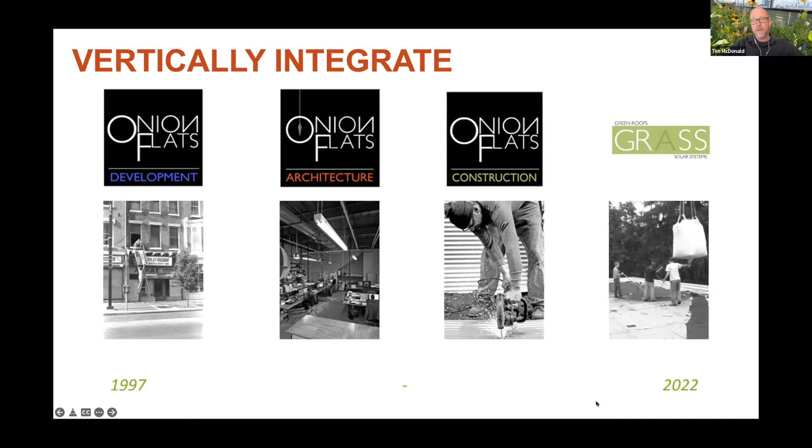Just to begin, I'm a big proponent of vertical integration when it comes to developing real estate. We're a developer, we're also architects, and we're builders. We do that not only for our own projects, but we also have a robust architecture firm where we're working for lots of multifamily, affordable and market rate housing clients. One of the other companies that's been created out of this desire to build high performance sustainable buildings is our green roof and solar company. That's kind of a separate company that does client work as well as all of our own solar and green roofs.

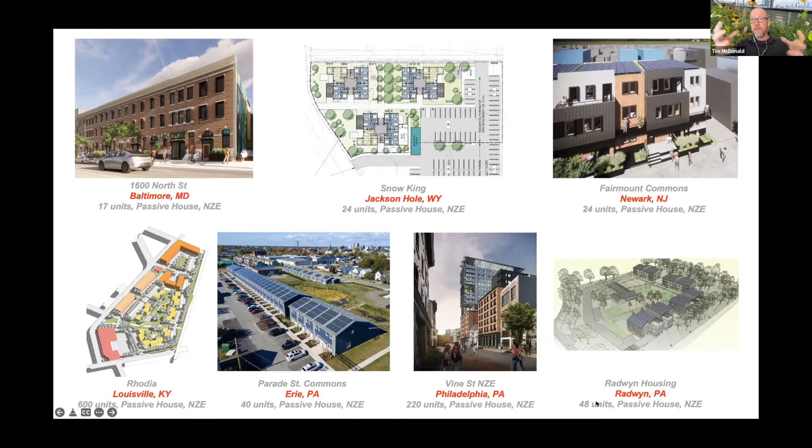These are some of the projects that we're either in the middle of, have completed, or have gone through schematic design and are on hold. It's everything from a whole retrofit series of projects that we're doing in Massachusetts, to single family homes, high performance single family homes, to these larger scale multifamily projects in Philadelphia, but really all over the country. Here are some other ones in Baltimore. We're doing another retrofit net zero energy passive house project in Louisville, Kentucky. So I'm just trying to give you a sense of the scale and scope of the nature of our work.

But what really grounds me every day when I wake up is the knowledge that buildings in this country are responsible for almost half of all greenhouse gas emissions. And I don't say that lightly. I think that needs to sink into everybody's brains here, particularly if you're an architect or if you're in the world of building buildings, the built environment.

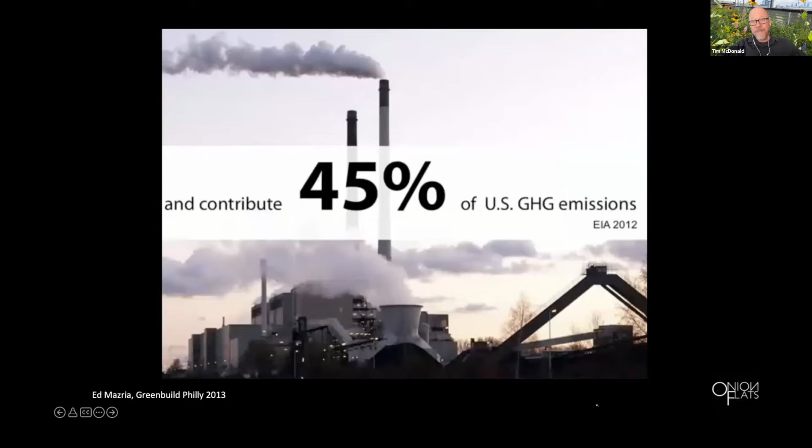We're half the issue. In Alexandria, it's even more than that. Between commercial and residential buildings, they're responsible for over half of all greenhouse gas emissions. Now, if we think we have any chance of addressing the climate crisis, we've got to do it with buildings, and we've got to do it immediately.

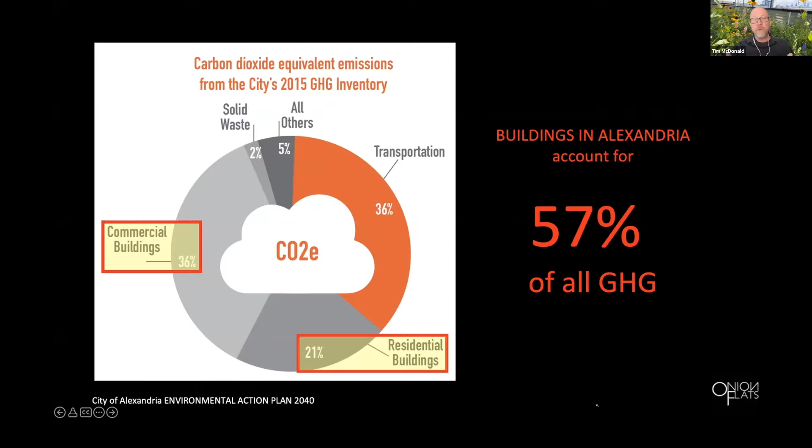Why do I say that? Because even though your environmental action plan of 2040 states what pretty much every climate action plan I've seen in any city, any state, or frankly any country uses, the 2050 target of the Paris Climate Agreement for carbon neutrality, all carbon emitted needs to go to zero, a very different world by 2050. The problem is that that's actually too late.

If we peaked emissions in 2020 and just a straight line down to 2050, just the area below that triangle accounts for about 600 gigatons of CO2 that we would be emitting. Number one, we didn't peak emissions in 2020. Number two, we only have about half that left to emit. So it's actually got to be much more radical than that.

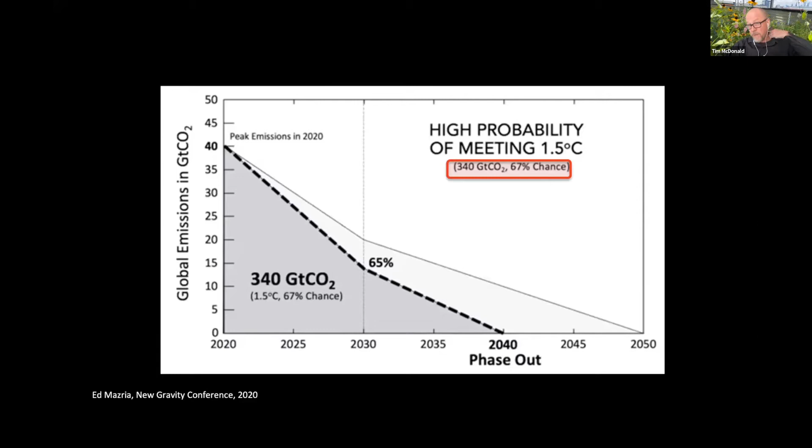We've got to radically reduce our energy consumption, as Stephen said, in the next 8 years, 65%, not 50%, in order to emit no more than the 340 gigatons of CO2 left to emit, if, of course, we want to keep the globe from warming more than 1.5 degrees centigrade, and we don't need to go into what that means in this presentation.

So for me, as an architect and a developer, that means that carbon neutral net zero energy buildings need to be standard practice, code by 2040. What that means for me is that building needs to generate what it needs on its own site. In other words, people think you can buy carbon offsets in order to pay for the carbon that your building is emitting. We're never going to get there if we treat this as a carbon offset strategy. We've got to generate what the building needs on its own site.

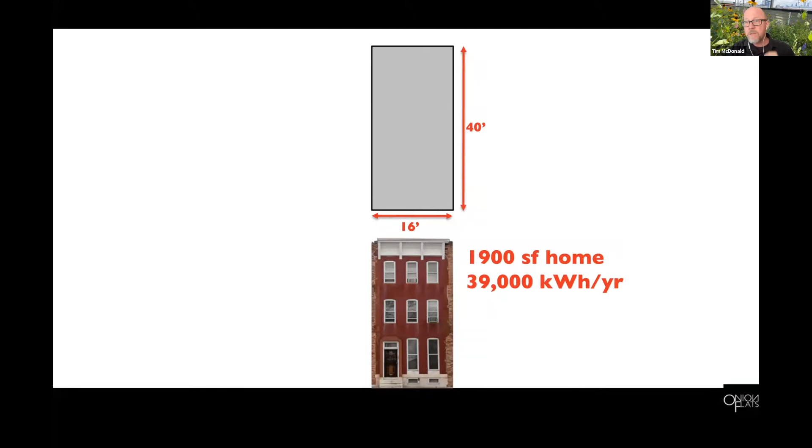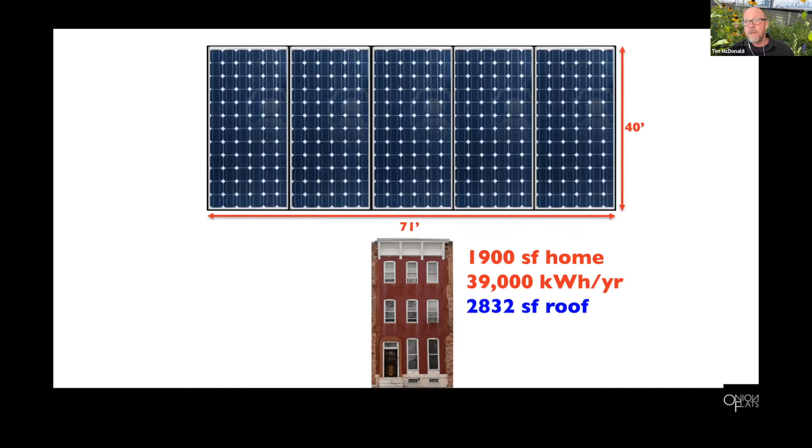Okay, so can we do that? Well, here's a typical row house on the East Coast. This is about how much energy that building uses in a year, 39,000 kWh per year. And here's the size of the roof, 16 by 40. Could this building get to net zero energy? It could, but it would need a roof 5 times bigger than it has. And so we've got to reduce the consumption to what the roof can produce, right? So that's about 80% reduction in energy consumption.

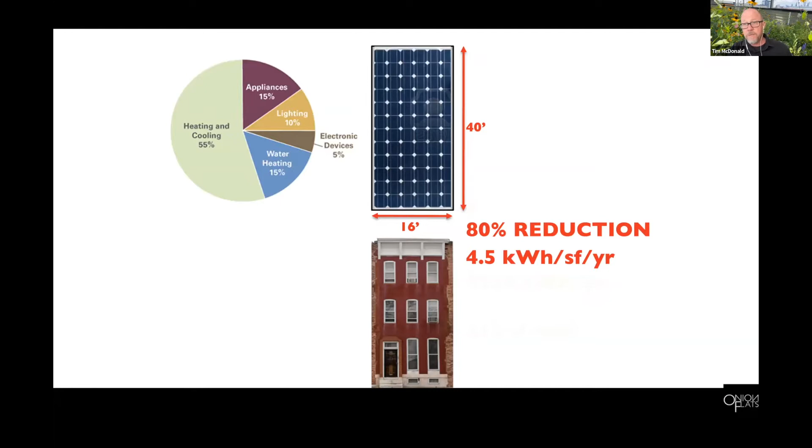We all know that heating and cooling of buildings is responsible for more than half of all energy consumed in the building. So my question is, what's the best heating and cooling system, most efficient, most cost-effective heating and cooling system out there? I think it's a coat.

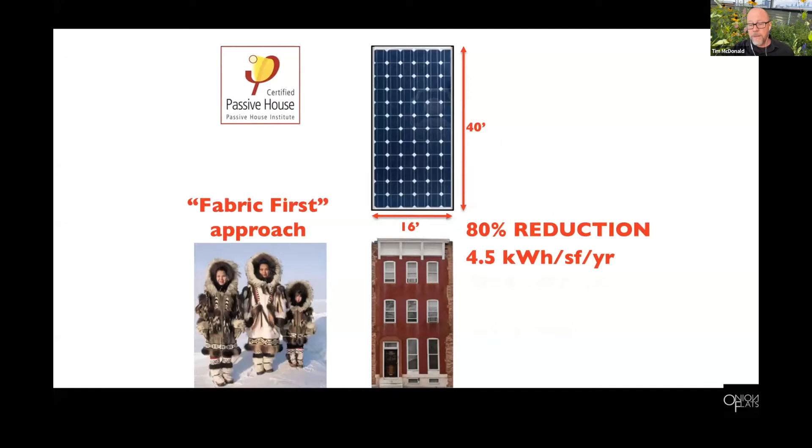And that is the essence of what Passive House is really about. It's fabric first. You're focusing on the fabric of the building first. And in so doing, by building a super insulated and really, really airtight building, you can reduce the energy consumption by up to 80% within that building. And it boils down to just simply good building science. Continuous insulation on the outside of the building, thermal bridge-free construction. You know, if you can make a simple compact shape, it's got to be an airtight building.

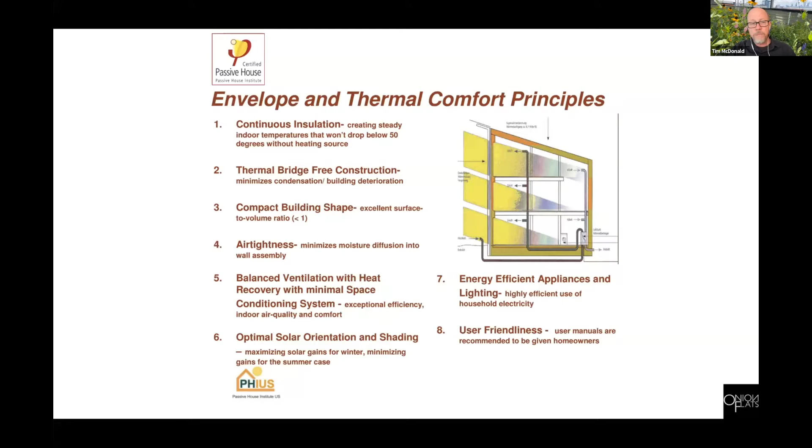But when you make the building airtight, you then have to give it a lung to breathe. So you have to bring in fresh air and you have to exhaust stale air continuously. And then just obviously, you know, optimal solar orientation, energy efficient appliances, and so forth.

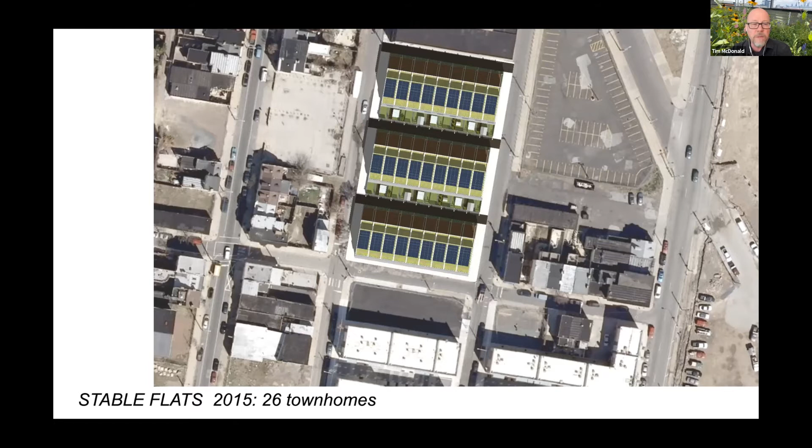So here are a couple of projects that we've completed over the past 10 or 15 years. This is a 26-unit townhome development in the Northern Liberties section of Philadelphia called Stable Flats. We completed in 2015. When you can orient your building to the south, it's difficult to do sometimes in urban environments, we do so. And so that's what we did. We aligned these three banks of housing, blocks of housing to face south so that we can manage the sun in the summer and bring it in the winter, generate power from the roof.

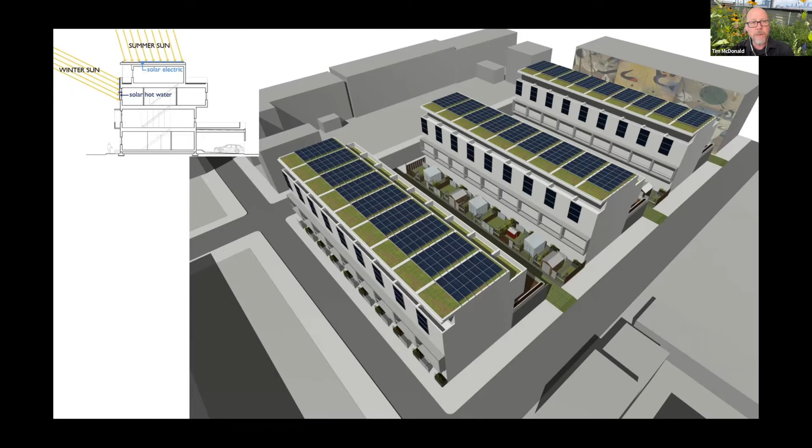But we can't just think about how we get there by thinking about how we design buildings. It's really about also how we build them, because we are effectively building our buildings the same way we've been doing for the past 150 years. And we've got to start thinking much more efficiently and effectively about how we build buildings. And so in this case, we started a modular factory.

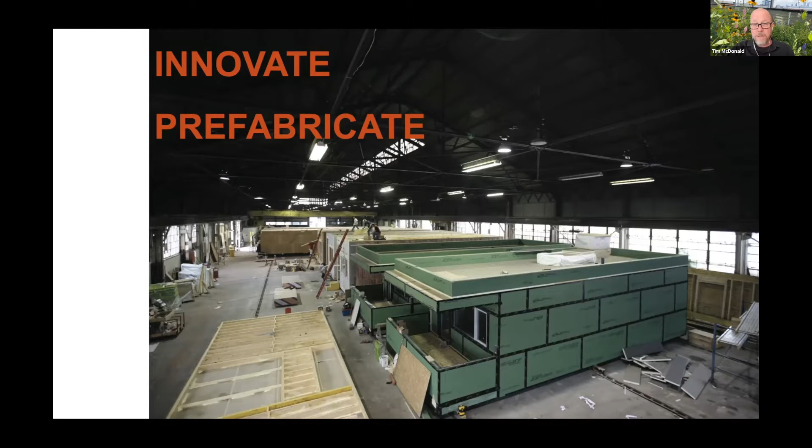We partnered with another company to develop a modular building system that could be replicated, simplified, and meet the Passive House standard. The first three houses were an experiment with many partners, built through this modular factory with plumbing, electric, and finishes all in place, and about a 4.5 kW PV array on the roof. The rest were built by different companies and partners, but all to the same Passive House standard.

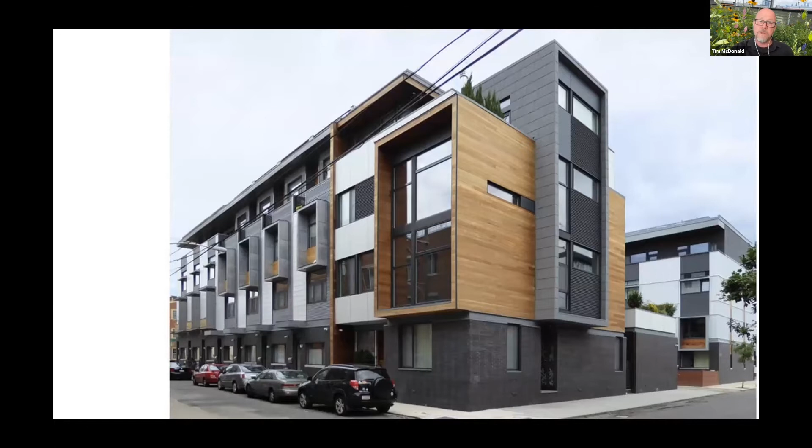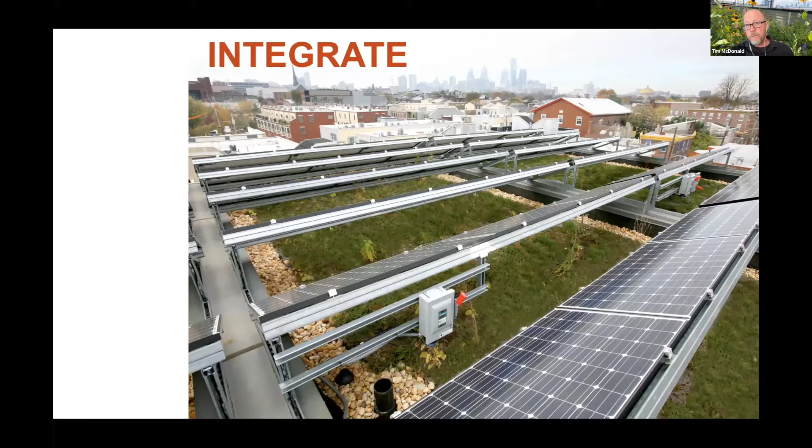I'm a big fan of really thinking about the importance of a roof, especially in an urban environment, because a roof has to do so much. It has to manage stormwater, generate the power a building needs, and since open space is a commodity, it has to be amenity space, green space, and so forth. The green roof below this solar array keeps the temperature lower, making the PV panels that much more efficient.

When you build a Passive House building, you've got to make it as tight as you can, and then bring fresh air in and vent it properly. The first thing you have to do once it's built is measure just how tight it is. 0.49 ACH50 essentially means that if you take the volume of the building and cut it in half, that half-volume of air can leak out within an hour.

That is super, super tight. Do you know what a typical building would be? It would be 7 ACH50 — seven times the volume of a typical code-built building leaks out within an hour under a certain pressure. So a Passive House is essentially about 14 times more airtight than a typical code building. And I must emphasize, airtightness is actually more important than insulation.

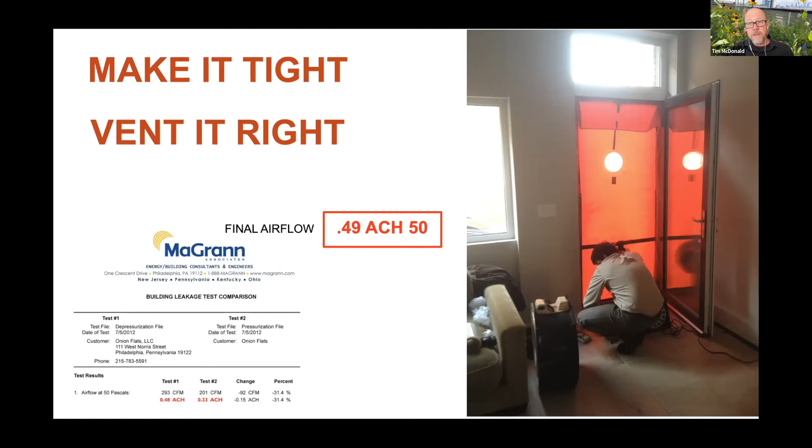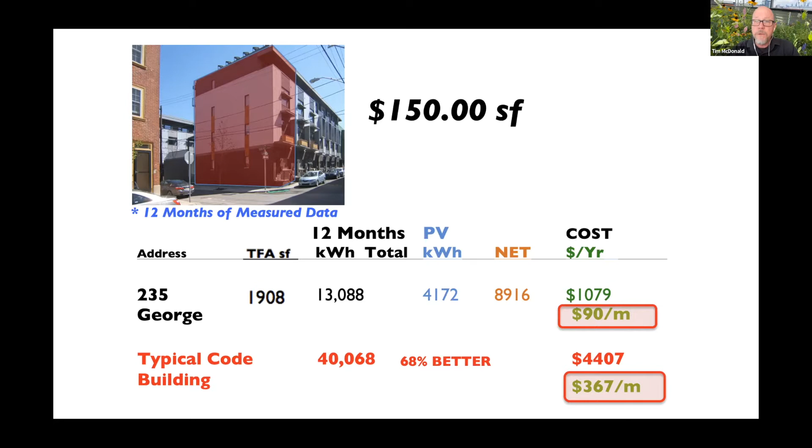And airtightness doesn't have to cost a lot of money — it's really just about attention to detail. At $150 a square foot, this was built at code-built construction costs. Part of this had to do with the decision to prefabricate, part with vertical integration, and part with carefully designing cost-effective mechanical systems. In the end, these 2,500 square foot townhouses use about $90 a month in utilities. They could put another 4.5 kW array on the roof and get to zero if they wanted.

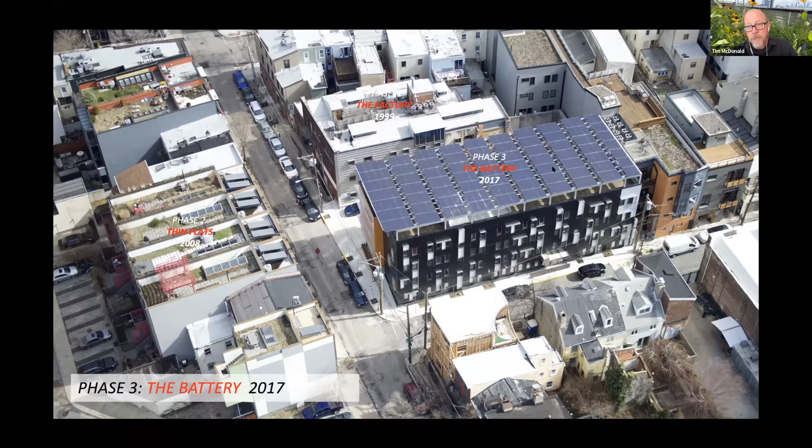Right around the corner from this is a much larger project, part of an 18-year development. The first phase was a retrofit of an existing factory, the second was the first LEED platinum duplexes in the country, and about 8 years later we developed the largest Passive House project we'd taken on, called the Battery — a 25-unit apartment building, about 17,000 square feet, with all centralized systems, which I'll mention briefly and we can talk about later. We're tending to move away from centralized systems now, but you can get a sense of the R-values in the walls and roofs.

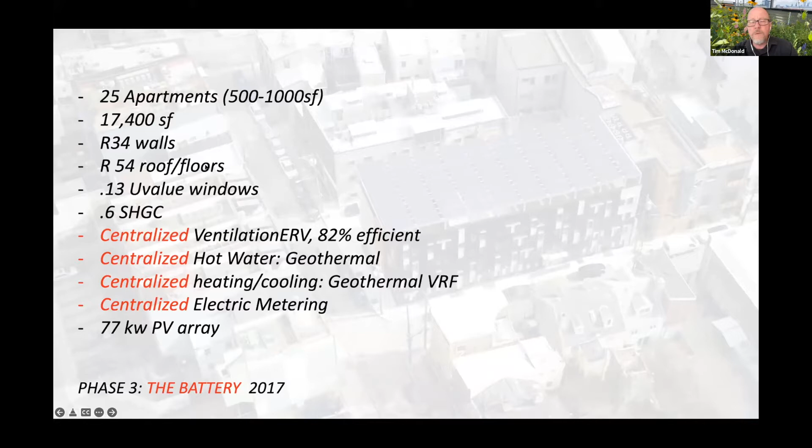This is pretty typical for Passive House within our climate: R34 walls, about twice what code requires, and R54 roof — not too crazy — with really good windows. At the ground level we needed parking like most projects do, so half the ground floor is parking, half is lobby and a couple of units. It's a very simple organization, mostly one-bedroom units with a couple of two-bedrooms, about 500 square foot apartments, double-loaded corridor.

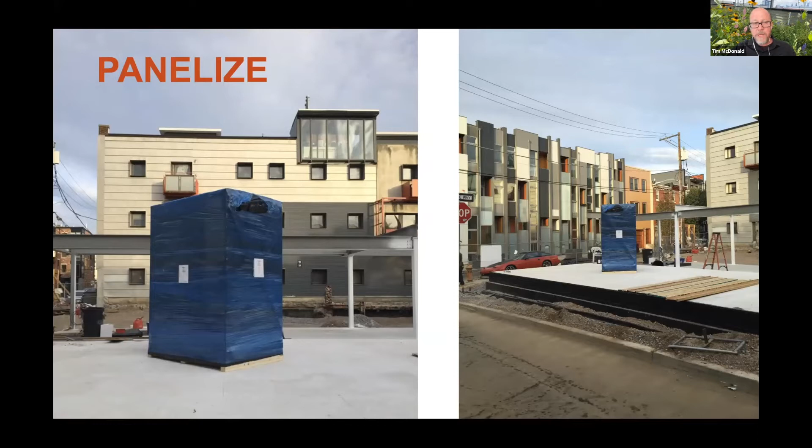As I mentioned, prefabrication is key to cost control for us. In this case, instead of modular, we focused on the envelope — the most challenging part of a Passive House building — since that's where it needs to be really well detailed. We're big fans of not reinventing the wheel or training an entire industry, so our envelope arrived complete with triple-pane windows and doors already installed, along with the weather-resistant barrier, air barrier, and exterior insulation. This building went up in half the time, and cost half as much from the framers since they didn't have to install windows or put on all those layers — they just had to put the pieces together.

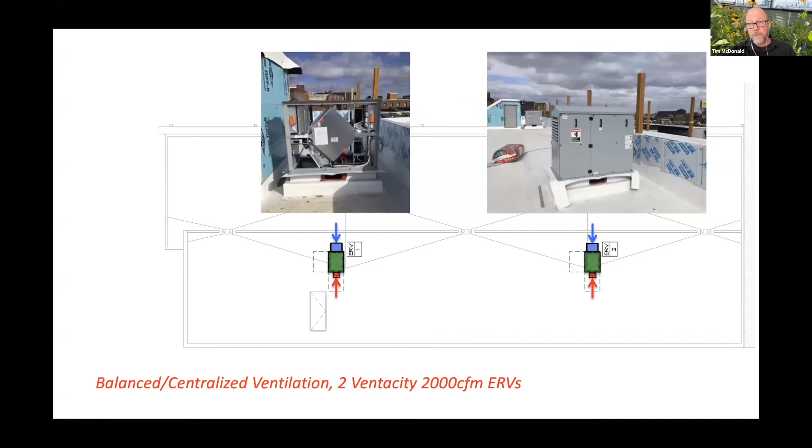Again, an airtight building, you've got to give it a lung to breathe. We've got 2 centralized ERVs, energy recovery ventilators, on the roof that exhaust all the air 24/7 at a very low volume, and then supply air at the same time without losing any energy. Here's that kind of pulmonary system of supply and exhaust in the building. You're supplying each bedroom, each living room, and exhausting each kitchen and each bathroom. And it needs to be balanced. Whatever you're bringing in, you've got to bring out.

And the other beautiful thing about balanced ventilation is that it's triple filtered, so the indoor air quality and the health of the occupants is superior to none in a passive house building.

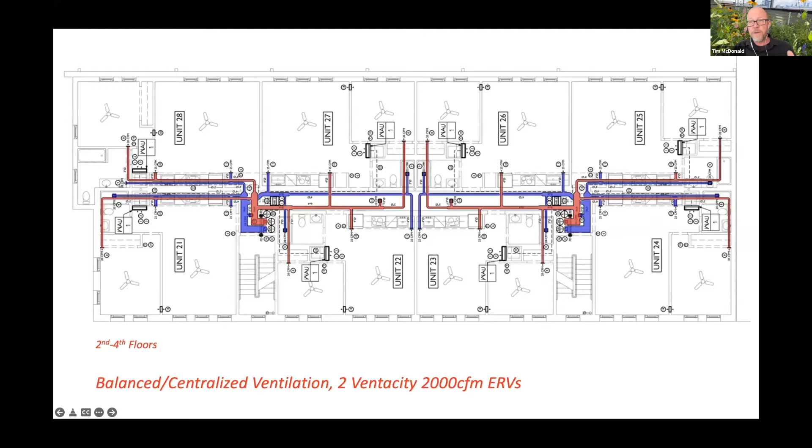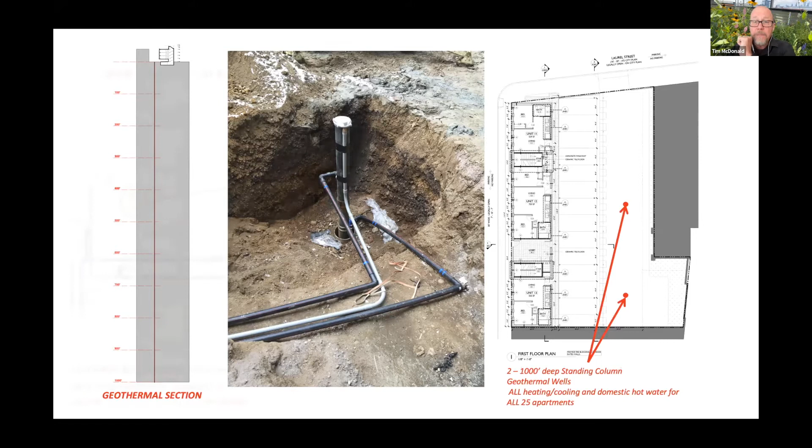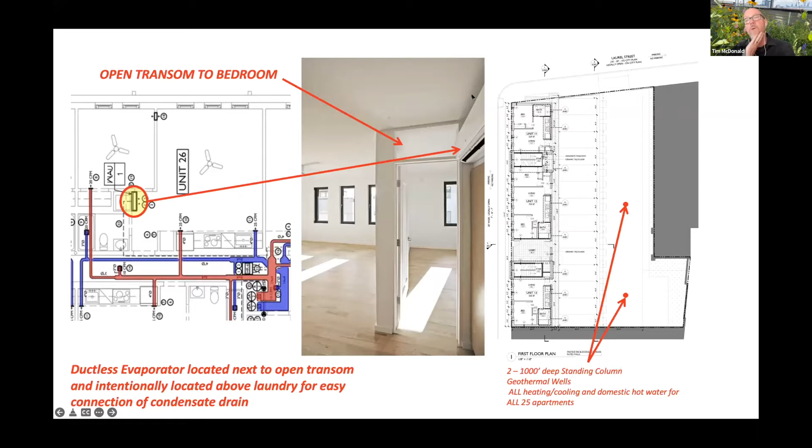In this case, we drilled two 1,000-foot deep geothermal wells into the ground. Why? Because it does our heating, our cooling, and our domestic hot water all in one. And here's how that kind of merges with the ventilation system. This is what heats and cools the entire apartment, just this one wall-mounted unit, so no condensers on the roof, for instance.

I want to really make the point of the importance of electrification. What do I mean by that? Buildings don't need gas. They simply don't need it. We haven't put gas in a building in 15 years. That's number one. Number two, it's significantly more cost effective to only bring one utility into a building. You bring gas in, you've got to vent it every time there's combustion. There's significant cost with bringing gas into the building, and you don't need it. You don't need it for hot water, for laundry, or for cooking. So electrify and simplify.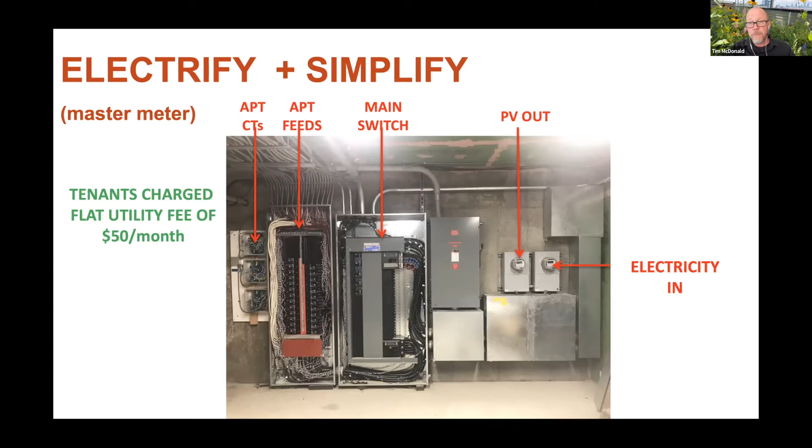Now, the next thing we tested was, if we're building these 500 square foot apartments, the utilities for them are going to be about $20 a month. Why would we have an entire room filled with 25 meters just so they can pay this minimal charge each month? So we decided to bring one master meter in and one meter out for the solar. We're monitoring the energy consumption of the units anyway, so why meter at the same time? So we're charging tenants a $50 flat rate, and we're actually making money. They're really happy because $50 a month is about half what they would pay in a typical building. So it seems to all work.

Again, the blower door test becomes a really critical part of the construction process. Everybody's excited when we hit the blower door test, and we did so here. And here's the building as it's completed.

I'll just note that this is a west-facing wall, so what you're seeing here has a couple of functions. One, it's shading the windows, but these white panels have LED lights above them, and they're tied into the energy monitoring system of the building. They also have an IP address associated with them, so they're tied into each apartment, but nobody knows which apartment is tied into which light, so it's a bit of a who's who.

When you come home at night, if you're working within your energy budget, your light will glow green. If you're really far out from it, it'll glow red or yellow, somewhere in between. This is a way to incentivize the community living here to live within their energy means, but it's also a way to educate the larger neighborhood.

Certified passive house project, and we built it at $169 a square foot, all in hard costs, all hard cost construction. At the time, that was right in line with everyday code construction all around us.

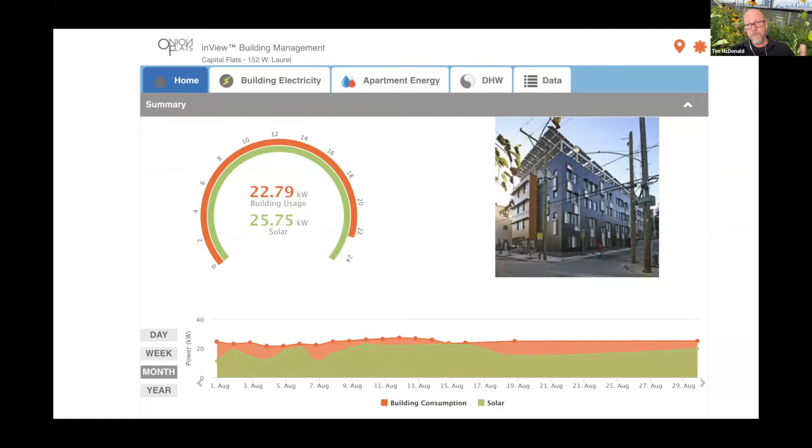Interiors are very simple, clean, but we use really good quality materials. We have translucent glass between rooms so that the space feels more connected and open. As I mentioned, we're monitoring the energy consumption of the building besides the one meter, and this is just the result of 2020's energy consumption.

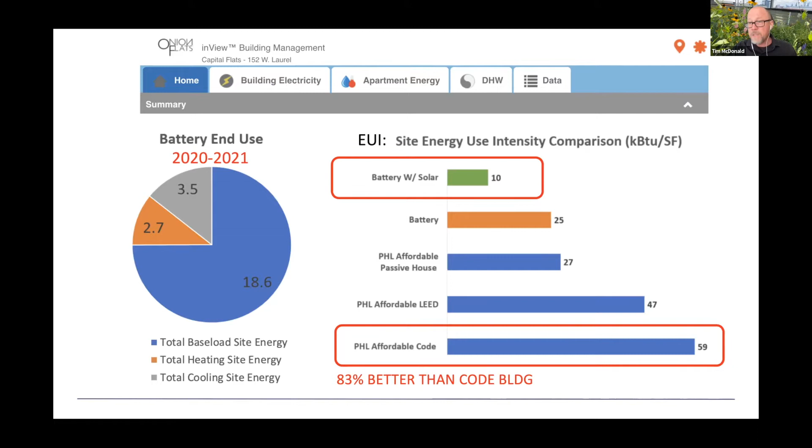A typical EUI, energy use intensity, is kind of like the miles per gallon of a car. A typical EUI is 60 for a multifamily affordable housing project in Philadelphia. Our EUI on this project was 10, which is 83% better than code.

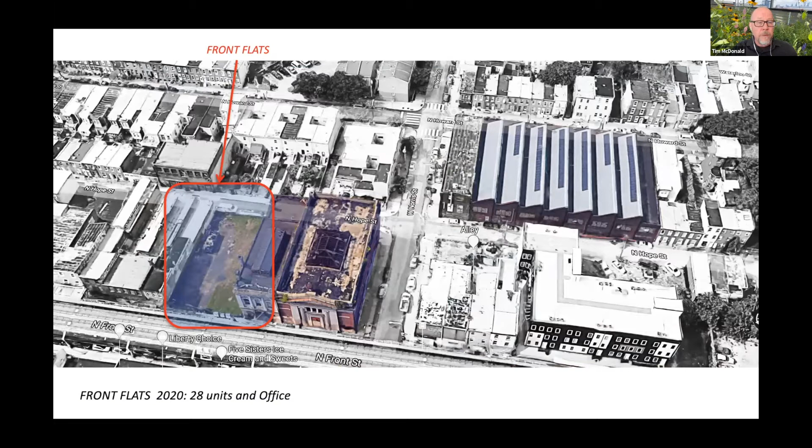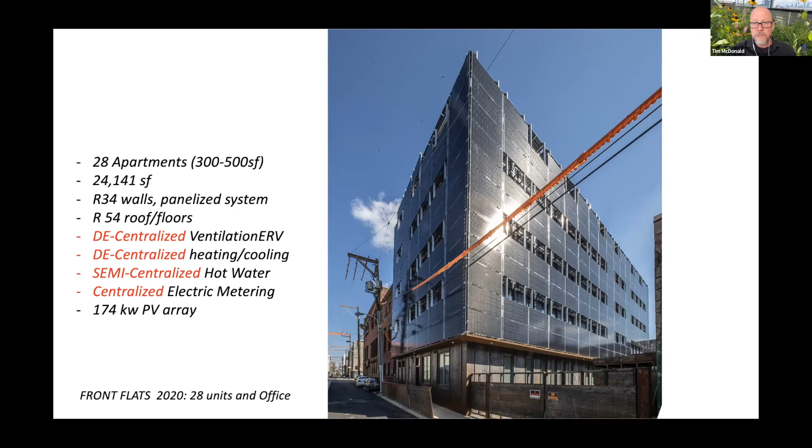One of the last projects I'll show you is a project we just completed a couple of years ago called Front Flats. It's about 5 minutes north of this, in Kensington. Two of the big experiments we took on here: we started to think about solar in a different way, not just as power generation, but as a skin. We also reconsidered the way the mechanical systems work, becoming much more interested in decentralized strategies, which I'll show you in a minute. And it's $180 a square foot, in line with everyday code construction.

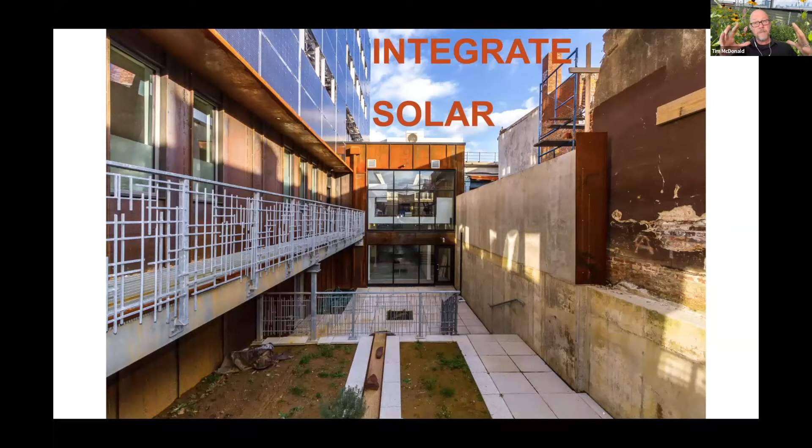Here it is from above. It looks pretty opaque, but really the integration of the solar into this building is a very different take, because we're floating these translucent panels. You can see the light coming through the panels. We're floating them about 24 inches away from the facade of the building, and the reason for that is threefold. We call it our solar veil.

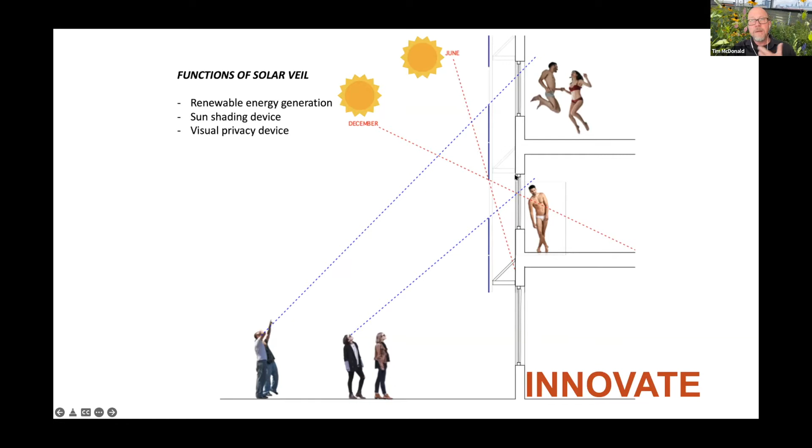It does three things. It certainly generates all the power the building needs, but this all-important summertime shading is one of the most crucial parts of this facade. You've got to keep the direct heat of the summer out, but let it in during the wintertime when the sun is lower in the sky. It's also a visual privacy device. It's on a very tight urban site, and instead of having blinds or curtains, it blocks anybody from seeing into your apartment.

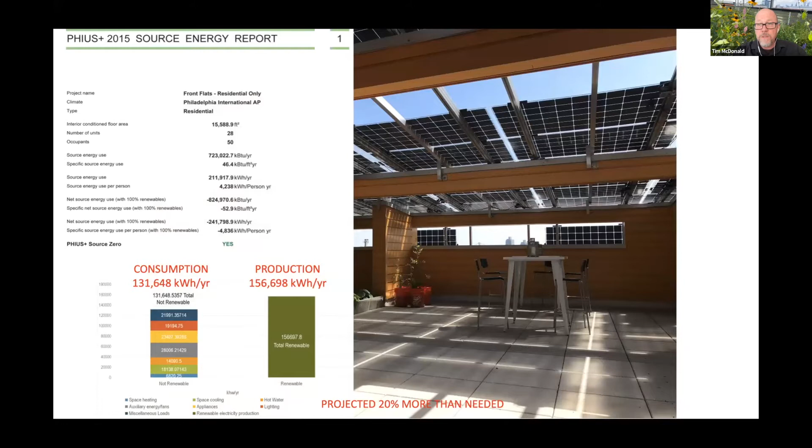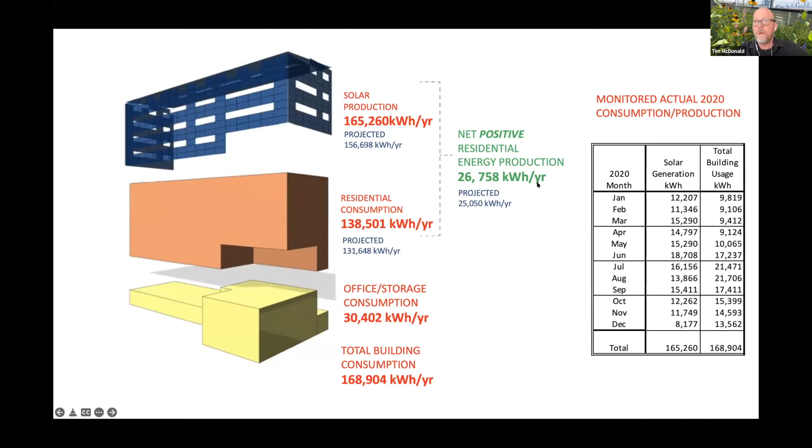These were our modeled projections of what we'd consume and produce, and it was pretty much dead on what happened. We were only going for enough solar to make the residential portion net zero, because we weren't quite sure what was going to happen in the commercial. We generated 26,000 kWh more than we needed, so we put that into the commercial space, making it a net positive energy building.

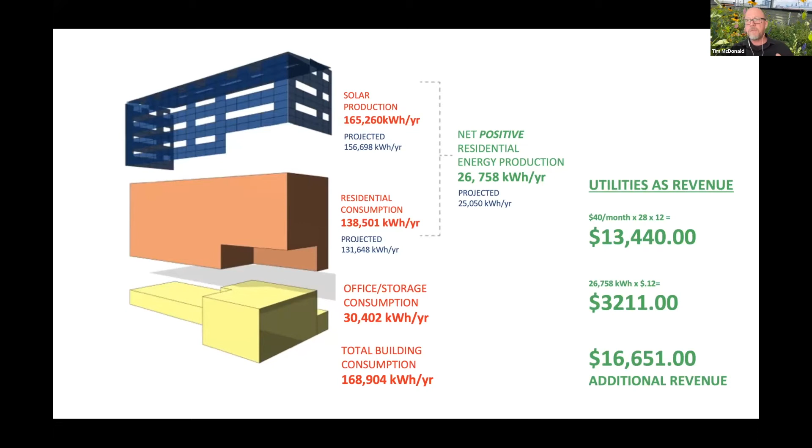The other interesting thing is that most developers want to put the utilities on the tenants, and I understand why. But once you start building these super energy-efficient units, maybe it's time to rethink the utility issue, because utilities can then become a revenue stream for the developer if it's a master meter. That's exactly what happened - in 2020 we made an additional $16,000 a year of extra revenue just from the utilities.

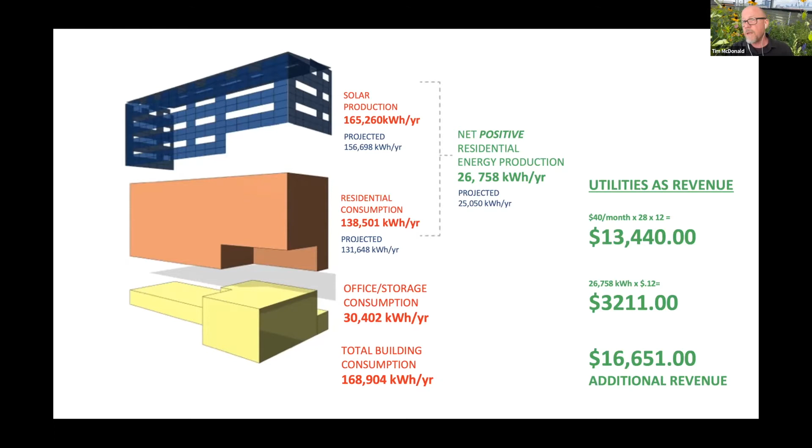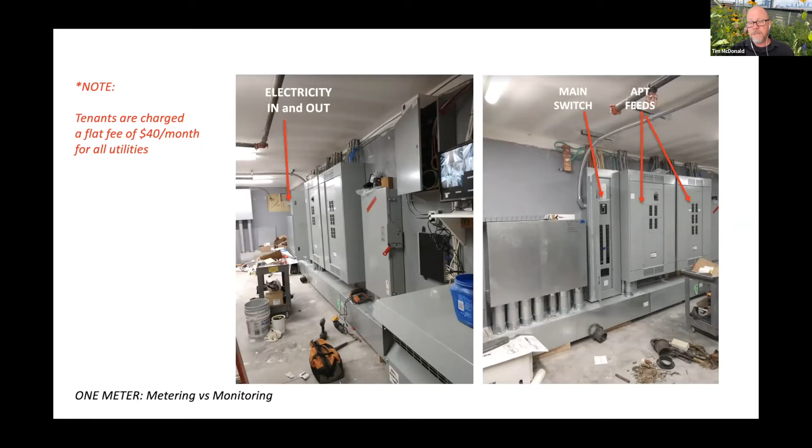We're also exploring decentralized heating, cooling, and ventilation strategies. There are now new products that merge all of those systems into one unit - an ERV with heating, cooling, and dehumidification, where the condenser is actually built into the unit. It's called a packaged unit, so you're not running line sets and refrigeration lines to the roof or filling your roof with condensers. The roofs stay clean and free, and everything is contained in this unit, with a supply and exhaust going outside and simple ducting to each room in the building.

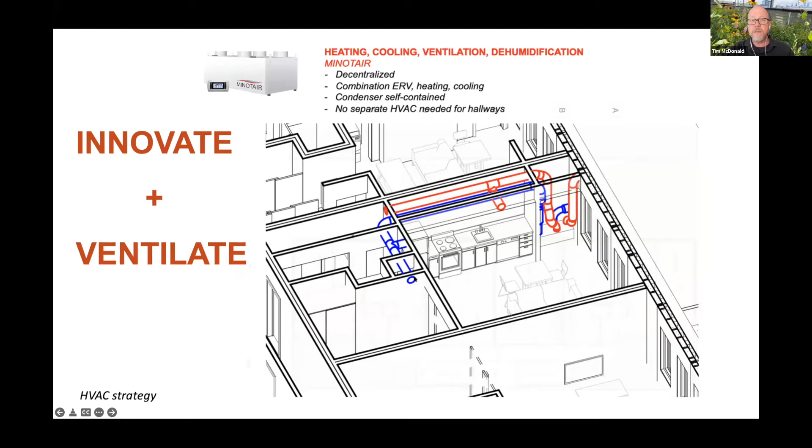One of the last things I'll quickly go through: once you solve the heating and cooling issue and significantly reduce your consumption, hot water is the next energy consumer to take on.

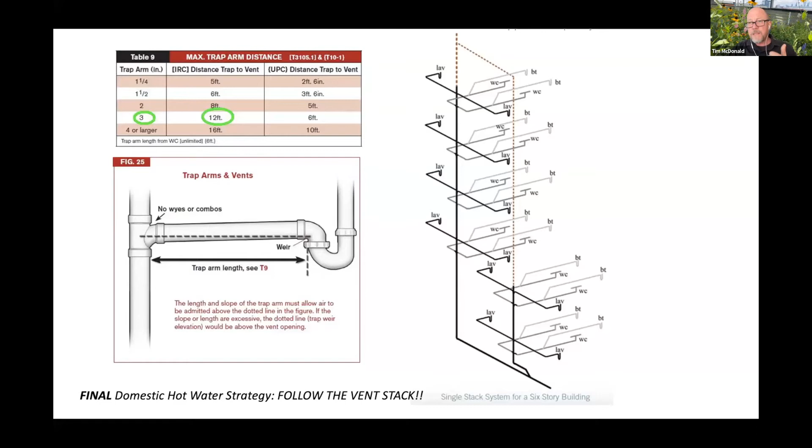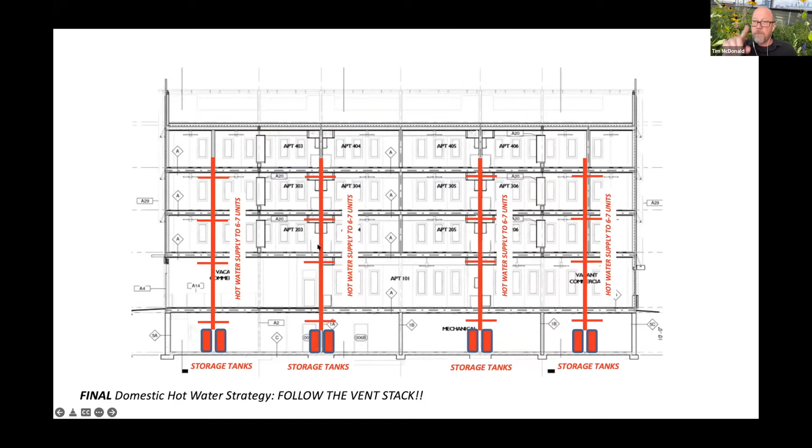So we redesigned the strategy for the hot water system in this project by looking at the way venting works in the building. The premise of plumbing, venting, and sewage is that your vent stack runs up very close to all your fixtures, so you've got very short horizontal runs to your fixtures. So for a different reason, energy conservation, we said let's follow the vent stack with our supply water lines. We located off-the-shelf heat pump water heaters at the bottom of these stacks, ran up very short vertical and very short horizontal runs.

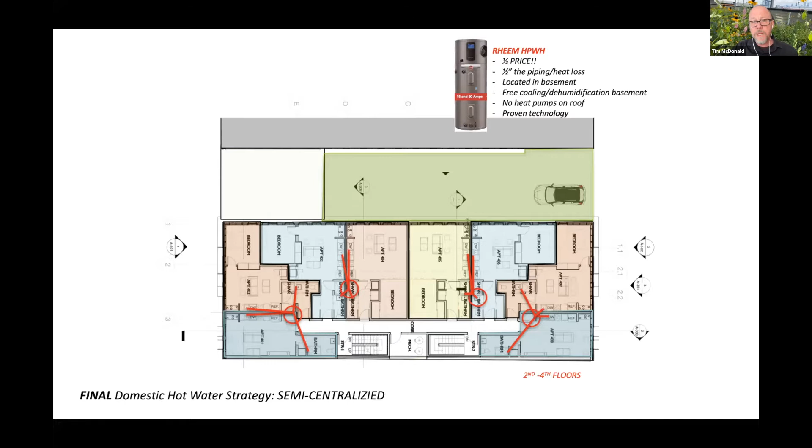So we cut the piping in half, cut the cost of the heat pump system in half, cut the insulation in half as well. This is a significantly more cost-effective approach to making hot water, as well as a significant reduction in energy consumption.

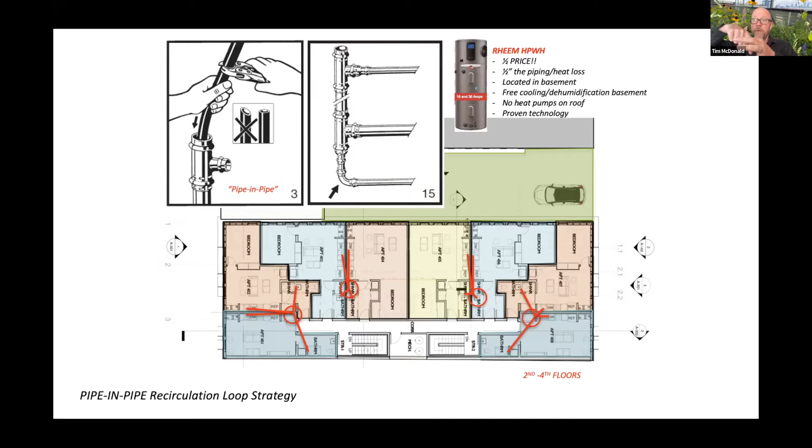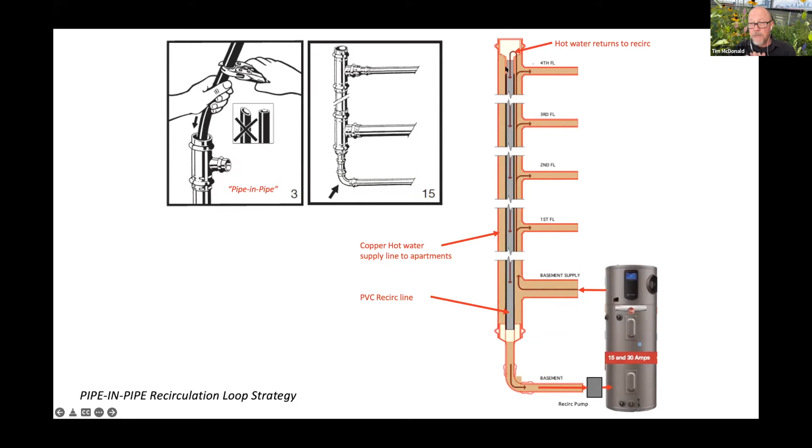But then the last part of this, the recirc loop - there's a technology out there that allows your recirc loop to go inside your supply line, such that you're only insulating one pipe, not two. You're not insulating the supply and the recirc separately; the recirc pipe goes inside the supply line and you insulate one pipe. So again, we cut the heat loss and energy consumption in half. And here are those typical hot water tanks.

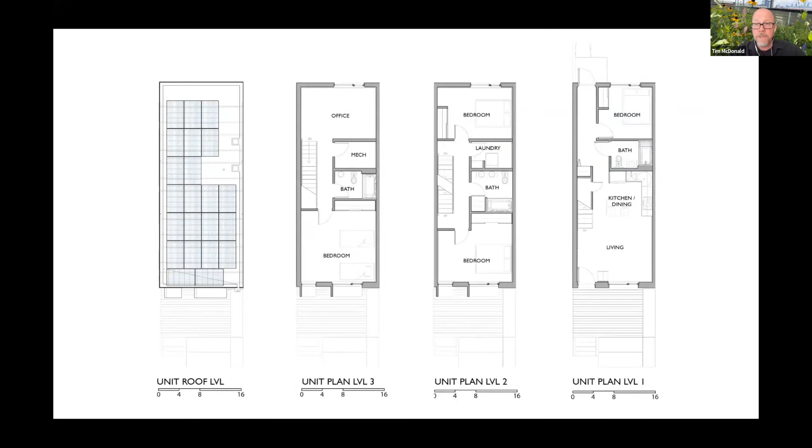And then the last project I'll show you is Belfield Townhomes. It was our first passive house project, for affordable housing, formerly homeless families, large families, 5-bedroom units. It was the first certified passive house project in Pennsylvania, and also our first attempt at a modular project.

This is where we really cut our teeth on developing a simple prefabricated strategy for building these high performance buildings. At our first attempt at a passive house blower door test, we beat it by 30%. I'm not trying to pat myself on the back - I'm just trying to say it's not that difficult. This is what it means to build a building that doesn't leak heat out in the wintertime.

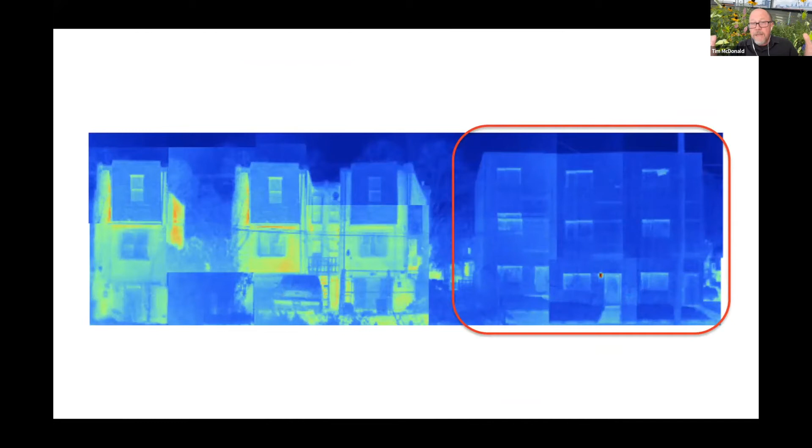This was taken in February. You can see what the rest of the neighborhood is like - it's just pouring heat out of the walls. Here you're keeping it in.

Simple but beautiful, resilient materials, lots of light, lots of air, triple pane windows. At the time, we could only get them from Europe. Now we can easily get them from multiple manufacturers here.

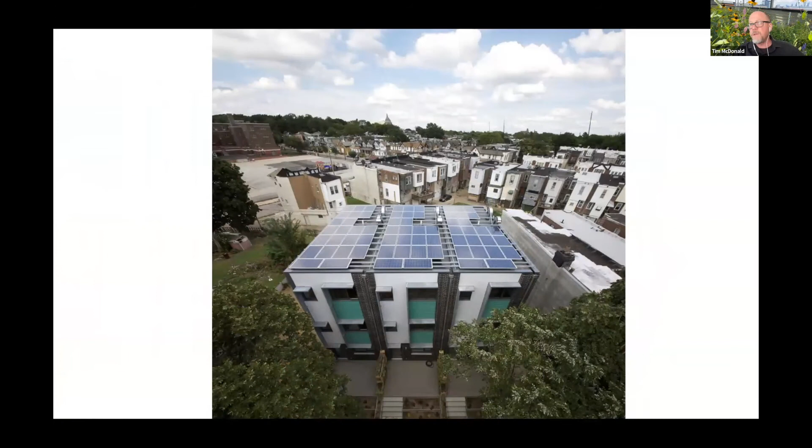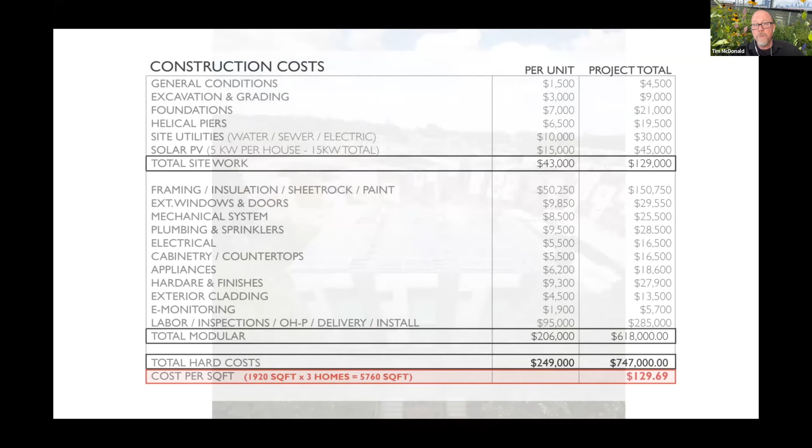And with 5 kW on the roof, it was designed to meet all of the energy consumption of the building. And at $129 a square foot, we said, well, if we can do this at our first attempt at a passive house project, why can't others?

So we went to the Pennsylvania Housing Finance Agency, showed them the project, and said, why don't you just push the idea of net zero energy capable buildings as standard by 2030? Maybe they don't put the solar on the roof, but they design it as a passive house building. And they said yes - the goal is net zero carbon neutrality, but the best tool I've found is passive house, and they agreed. They said, okay, how do we do this?

How do we incentivize developers to build to this standard? That's when I learned about the low-income housing tax credit program and the QAP application process. In every state it's slightly different, but Pennsylvania was 120 points - the more points you get, the more opportunity you have to get funded. It's extremely competitive in every state I've talked to.

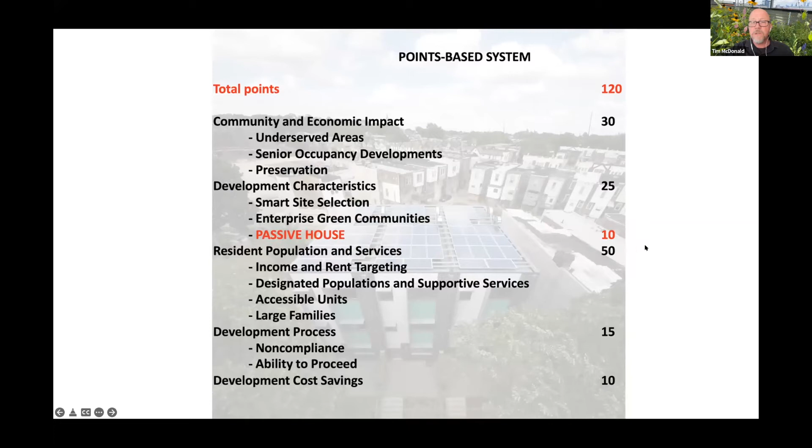So they suggested, let's just put an extra 10 optional points in here for passive house, see what happens. Well, what happened was 38% of the projects that applied - there were about 100 projects - 38% of them came in as passive house projects. Why? Not because they necessarily wanted to do the passive house projects, but because they wanted the 10 points.

They wanted to get funded. So that competitive nature of the QAP actually is the secret sauce in getting these projects to make sense.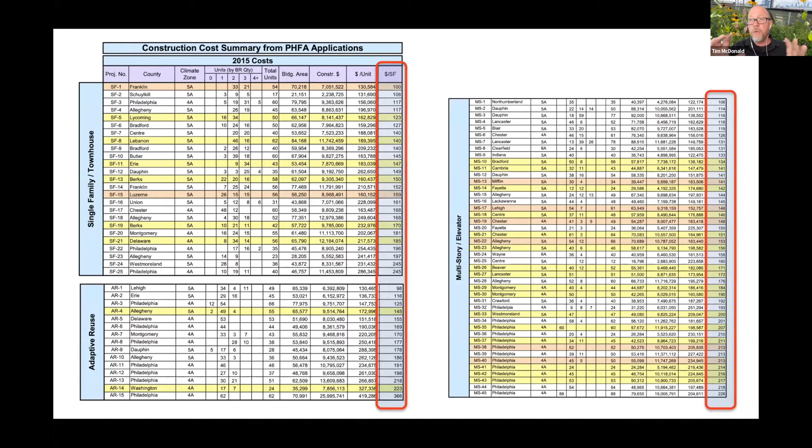Now the question is, PHFA funded 7 multifamily projects here. Well, how did they look in terms of cost effectiveness? These are the cost per square foot, the hard costs of all those projects that applied. All the white ones are code built applications. All the orange and yellow are the Passive House projects. We compared the code built to the Passive House projects, and it turned out that it costs 2.5% more for the Passive House projects than the code built projects.

PHFA said, you can do that within your contingency. This is fantastic. And they said, let's do it, let's go. And so they funded these 7 projects, they all got built. The question was, did they get built for what they said that they would build them for at application? Well, it turns out, yes, they did.

These are developers that have not done Passive House before. And yet, at application, they were $161 a square foot on average, and they got built for $168 a square foot, within their contingency. Same exact thing for the non-Passive House projects, they cost a little bit more at completion, but within their contingency. The point is, they got built with inexperienced builders, architects, and developers for the cost that they said that they would build them for.

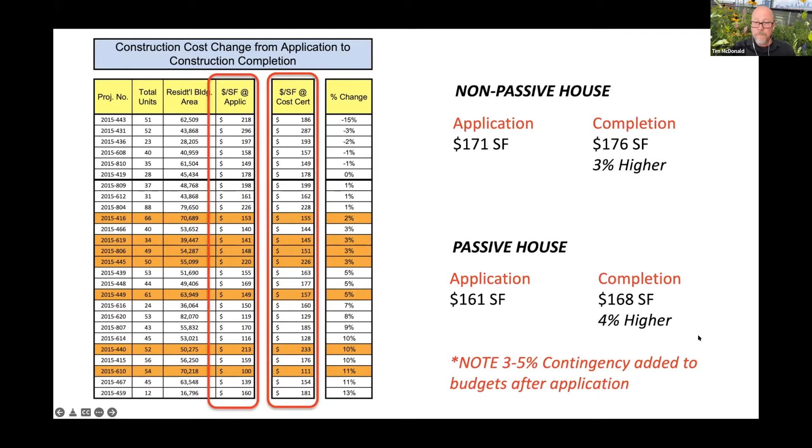Second year, they funded 10 projects, and we did the same comparison again. And guess what happened? It flipped. The Passive House projects came in about 2% less. Again, I don't care about whether it's 2% more or less. I think the point here is that these high performance projects, buildings that are using 75 to 80% less energy than typical code buildings, are being built on par with code buildings.

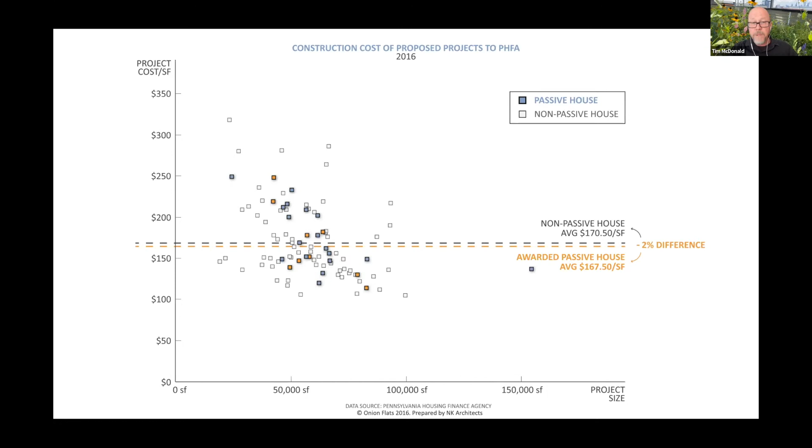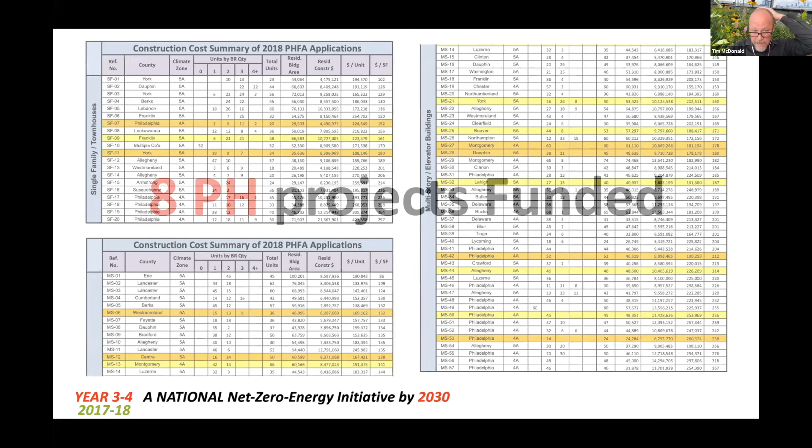And here are all those projects that were funded and are now built. The third and fourth year, 8 more projects, exactly the same thing happened. Exactly the same difference, the delta, between the non-Passive House projects and the Passive House projects, on par with code built construction. And this is one of those that initially got funded.

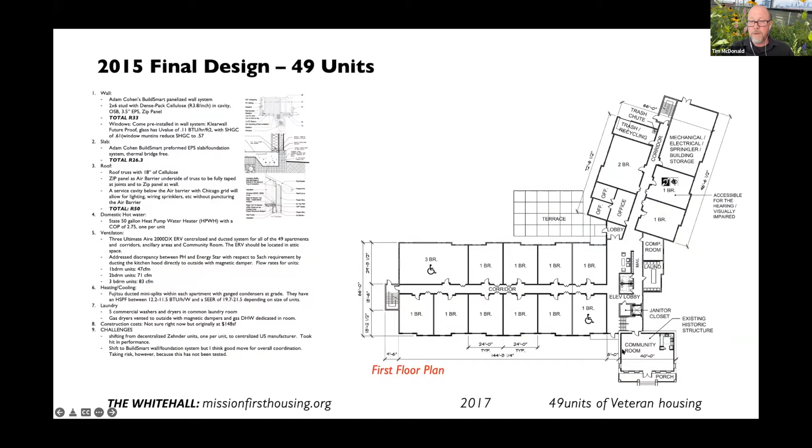I just want to make one point here. This is for veteran housing, I think 49 units. It was an existing historic building, actually right here, and they built a 49 unit apartment building around that.

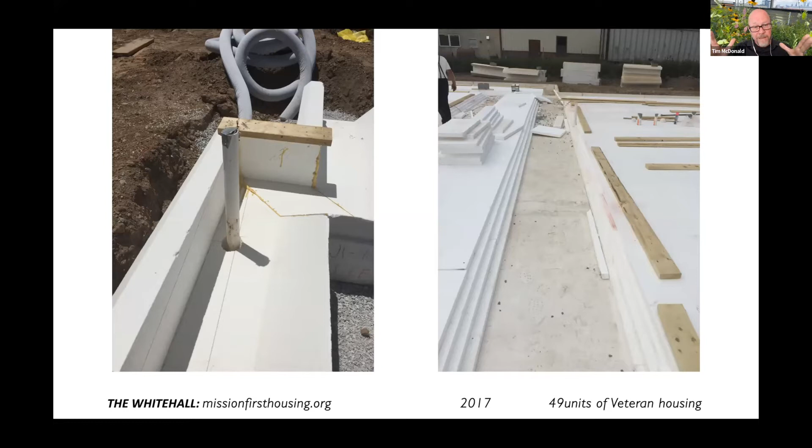Prefabrication. The foundation itself was this prefabricated insulated panel. So you're not building a stem, you're not digging a footing, pouring the footing, then building a stem wall, then pouring the slab. This is all in one, the insulation for the foundation itself, all in one. So it took half the time to pour this.

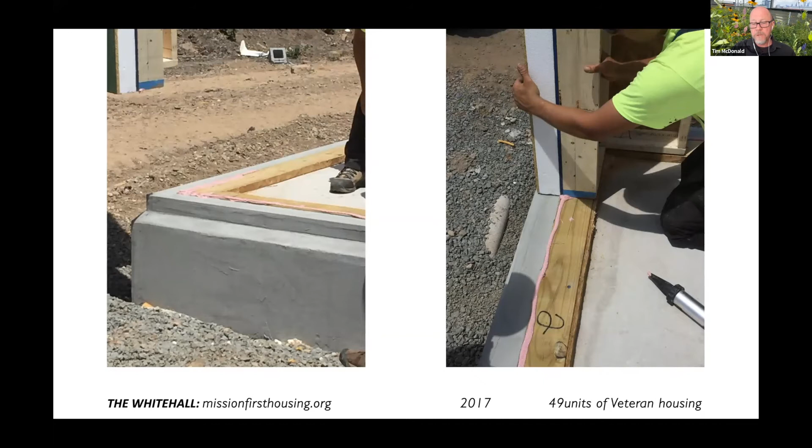And on top of that prefabricated foundation is a prefabricated wall system, like I've shown you in other projects. The wall showed up with the insulation in it, exterior insulation, windows, doors, and went up in half the time with a team that has never attempted a Passive House project. And before the drywall and insulation was even up, the pre-drywall blower door test, we hit the Passive House standard. And then the final one was even better.

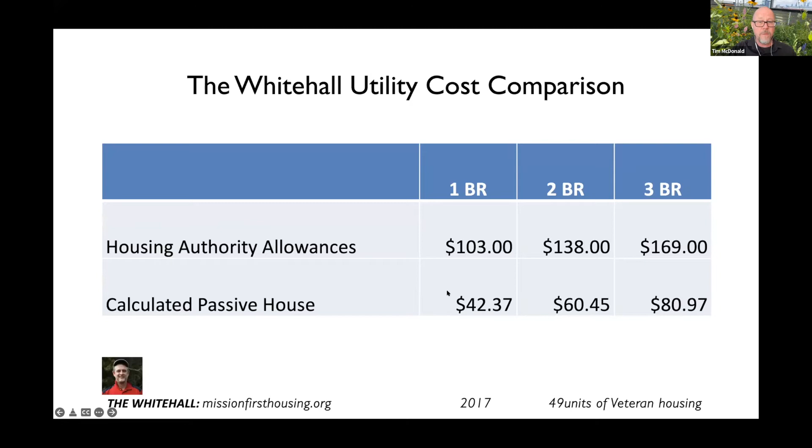So this is the point I want to make for all the developers out there, as well as the housing finance agencies. This is a typical allowance for a 1-bedroom apartment in terms of utilities. Well, the owner went back and said, look, and this was conservative, we're going to be able to cut that in half. So I should be able to generate more revenue, right? Because as you all know, 30% of somebody's income goes towards rent and utilities. Well, what happens when the utilities come down? The rent should go up, so the revenue should increase. And that was the argument he made.

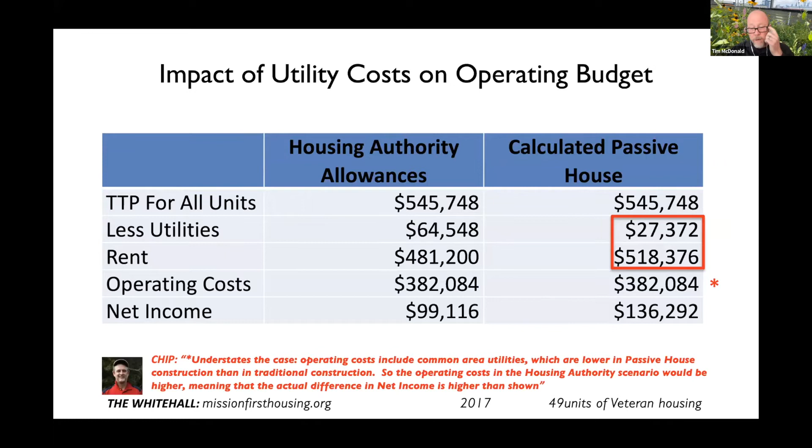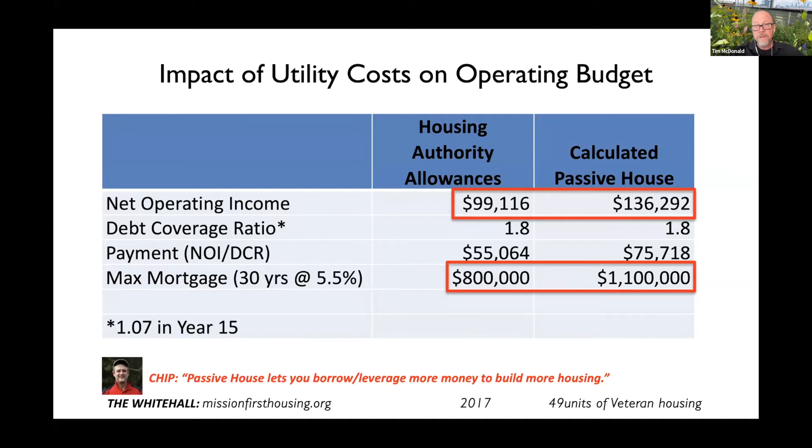He said, I should be able to pull more money out of this project. And that's exactly what he did. He pulled $300,000 in further debt out of the building. And I just love what he says here: Passive House lets you borrow, leverage more money to build more housing. So this isn't just solving the climate crisis, this is solving an affordable housing crisis, not to mention an equity crisis and a health crisis as well, because these are the healthiest buildings you can live in. And there it is, he put $300,000 not in his pocket, but into more housing.

Why not see what other housing finance agencies would do? So we went to 40 housing finance agencies to date, and we're not through all of them yet. So far, 18 states, and I just found out that Virginia is one of them, have done something similar to what Pennsylvania did, put Passive House into their QAP.

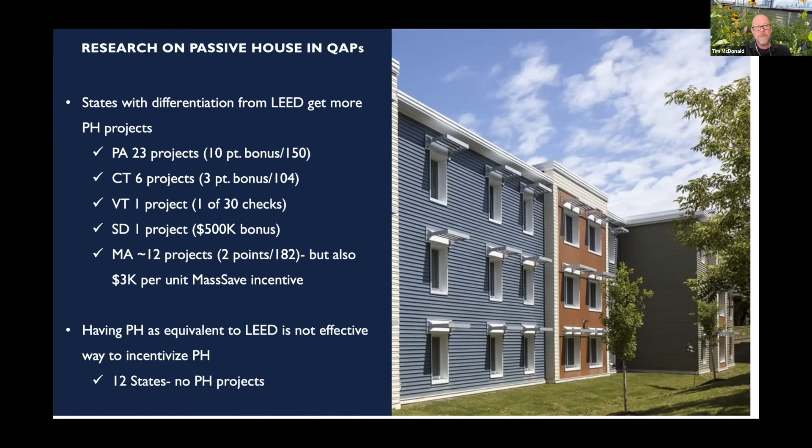Here's a perfect example of what happens when you put Passive House in and make the points equivalent to LEED: no Passive House projects get built. Here's what happens when you give more points to Passive House projects. Now remember, LEED or Enterprise Green Communities isn't necessarily entirely focused on energy consumption. Passive House is about radical reduction in energy consumption. So you should be getting more points for those kinds of projects.

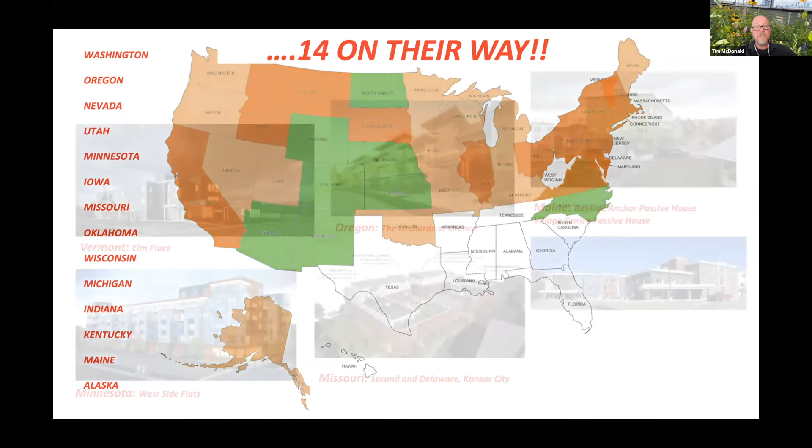And even in 14 other states where it's not in their QAP yet, they're still building them to the Passive House standard because it makes sense. Here are some examples of that.

We have a conference every year focused specifically on affordable housing and Passive House buildings and lessons learned, called the New Gravity Conference. There'll be one this summer. I hope you can make it.

The last thing I want to say is this initiative is laser focused on affordable housing because of the competitive nature of the QAP. But the intent here is that the architects, engineers, and builders who do affordable housing very often also do market rate housing. So this initiative, while focused on affordable housing, is really a catalyst for market transformation, because we should be doing this in every part of the building industry.

So the lessons learned to take away here are: prefabrication, vertical integration, keep it really simple, educate your tenants about the systems and utilities, leverage those utilities to build more housing, incentivize Passive House beyond some of the more holistic sustainability programs. Please don't put gas in any buildings—you don't need to, and you'll save money doing so. And don't think about PV as second or later; think of it as part of your capital stack now.